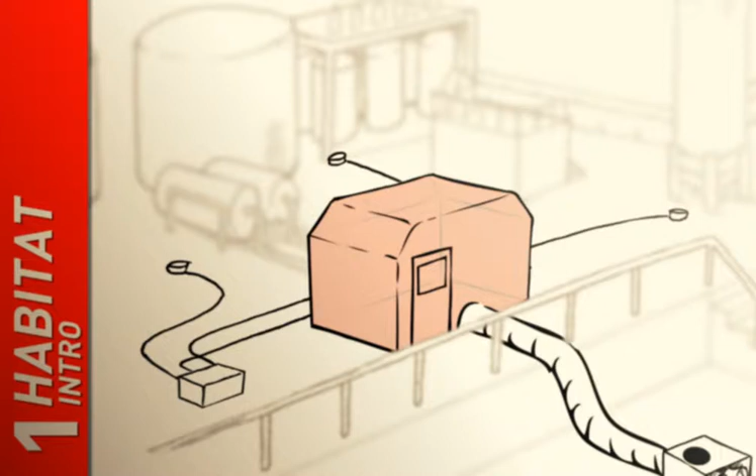A habitat is an established and safe solution for isolating an object or work area. Habitats enable hot work in exposed areas to be carried out safely. An overpressure is established inside the habitat, which makes it possible to work without gas from the surrounding area seeping in. As for all hot work, a risk assessment must be carried out in advance.

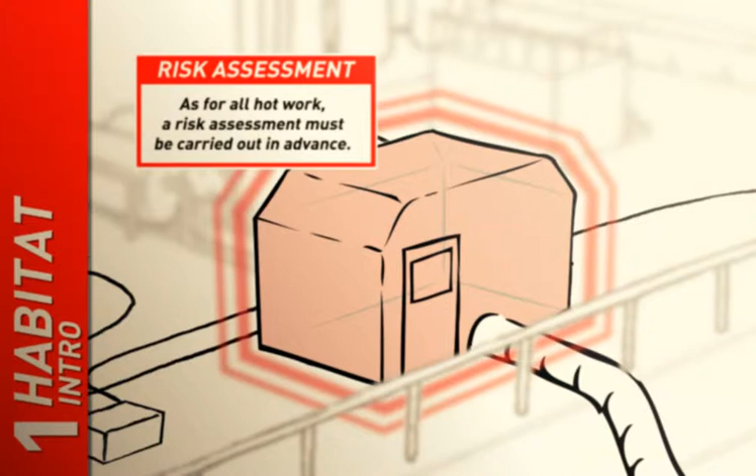The use of a habitat requires a dedicated habitat safety guard, who has the important task of monitoring the worksite. Planning and risk assessment in connection with the construction of the habitat shall meet a number of HSE requirements.

The construction of the habitat, as well as the strength of the fabric, must be able to withstand the relevant wind stresses in the area in which it is placed. The fabric must be fire retardant. Escape routes shall be adapted and labelled for safe evacuation.

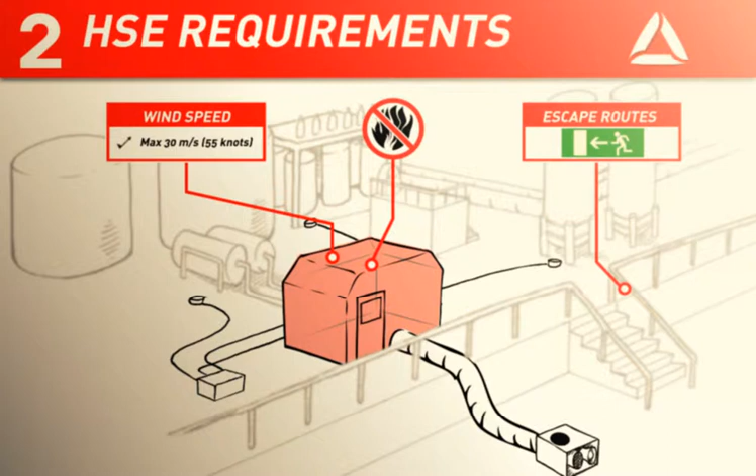The habitat must be equipped with ignition source control, so that the electrical supply to tools and equipment is shut off if gas is detected. The habitat shall be operated and maintained by personnel who have the necessary competence. When working in the habitat, ergonomics, noise and exposure to chemicals must be taken into consideration.

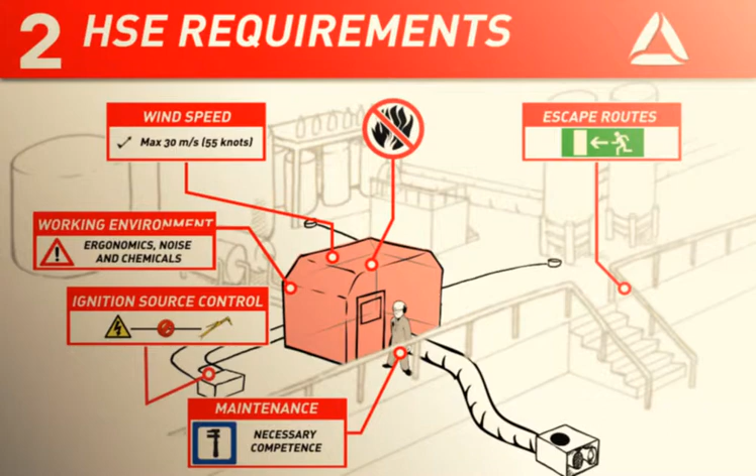Working Together for Safety has prepared a recommendation regarding the use of habitats as an ignition source control measure. You can find more information about the various HSE requirements in this document. The rest of this animation presents a summary of the recommendation, which focuses on the safe use of habitats.

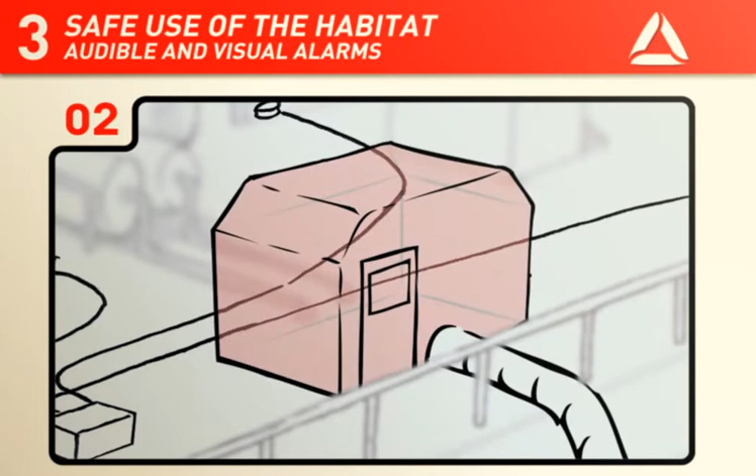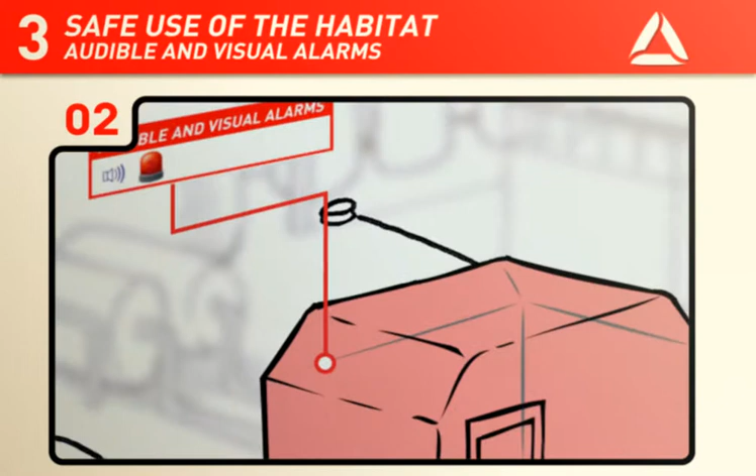The habitat shall be equipped with windows, so that the safety responsible outside the habitat can see and maintain control over the work inside the habitat. Communication must be established with the central control room, and the habitat system shall be equipped with both audible and visual alarms. Welding equipment must be placed inside the habitat, since these are not usually EX-approved.

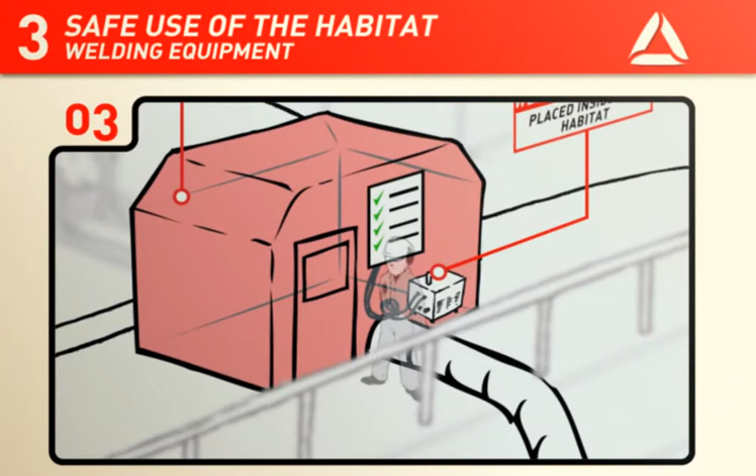The safety functions within the habitat shall be checked and tested before use, and inspected daily in accordance with checklists. Checklists shall be stored together with the active work permit.

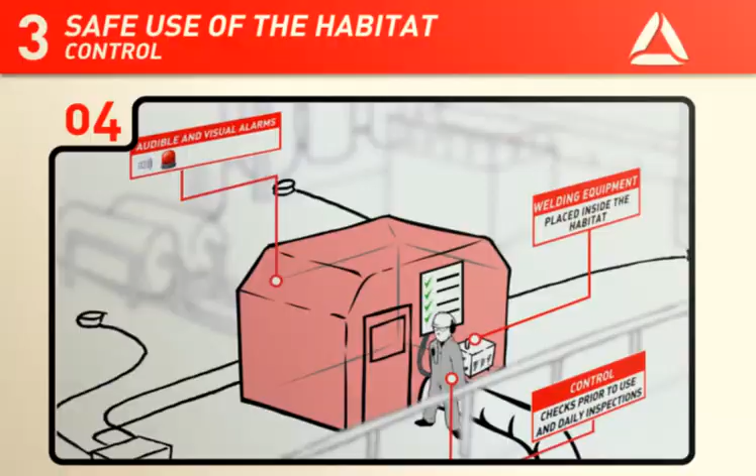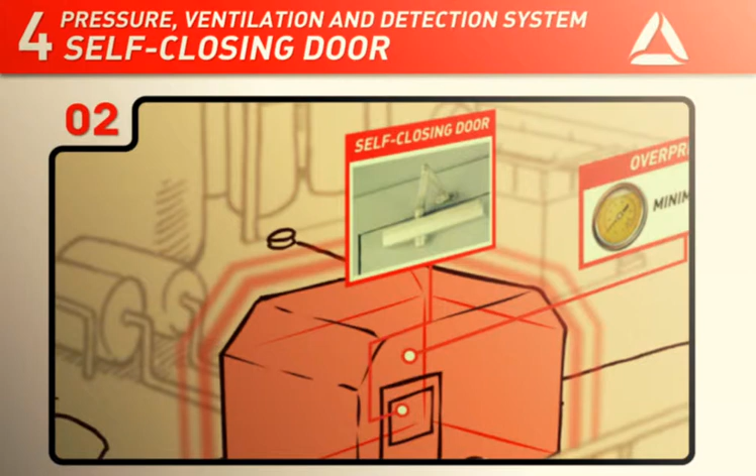The habitat must be constructed so that an overpressure of a minimum of 50 pascals can be established. The habitat can lose overpressure after just a few seconds of the door being open, and should therefore be equipped with a self-closing door. The fan or compressor should be placed in a safe area to ensure that no flammable gases are pulled into the habitat and air supply system.

Electrical and pneumatic fans shall be EX-approved for use in classified areas and feature an emergency stop device. The fan shall be shut down and damper closed if gas is detected at the air inlet, or the emergency stop device shall be used.

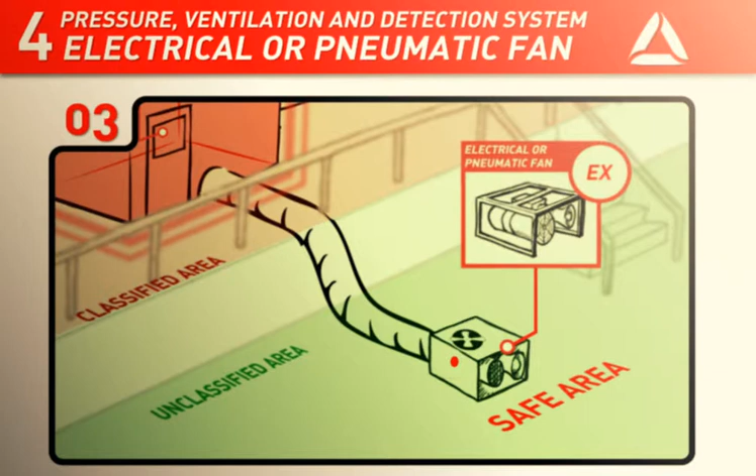For work in the habitat which represents an ignition source, even after the electricity or gas supply to the habitat has been cut off, the fan unit and damper must be independent of the working electrical current to ensure continued overpressure in such situations. The habitat must be equipped with at least 3 external gas detectors.

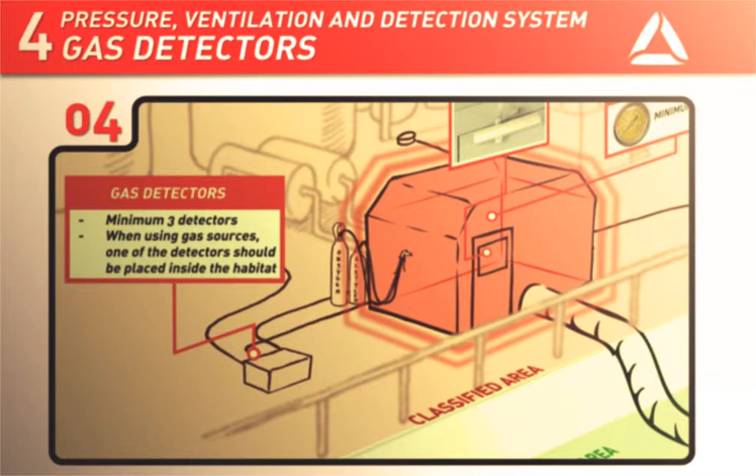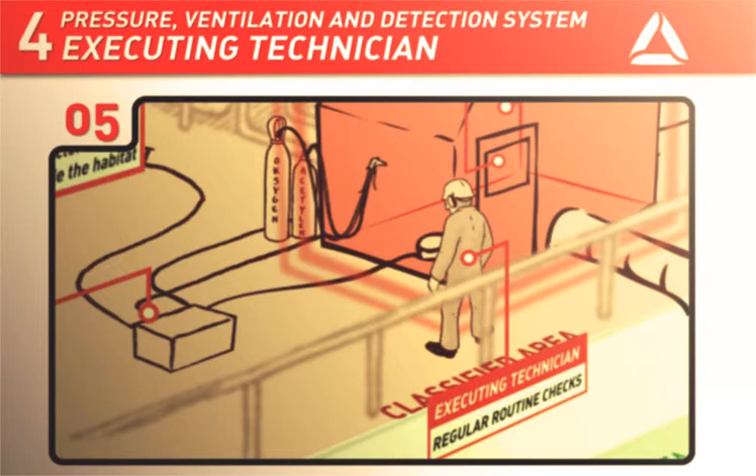When the habitat is used with any gas sources within the habitat itself, one of the gas detectors should be placed inside the habitat at the lowest level possible. The executing technician is responsible for carrying out regular checks to ensure that the gas detectors are correctly placed.

The habitat should be equipped with a zinc bucket for used welding electrodes, and appropriate fire extinguishing equipment both inside and outside of the habitat. Water bottles or water tanks for cooling the workplace should also be available in the immediate vicinity.

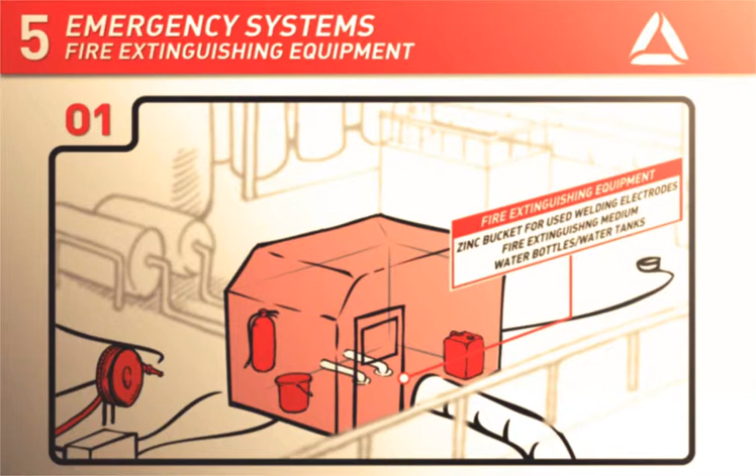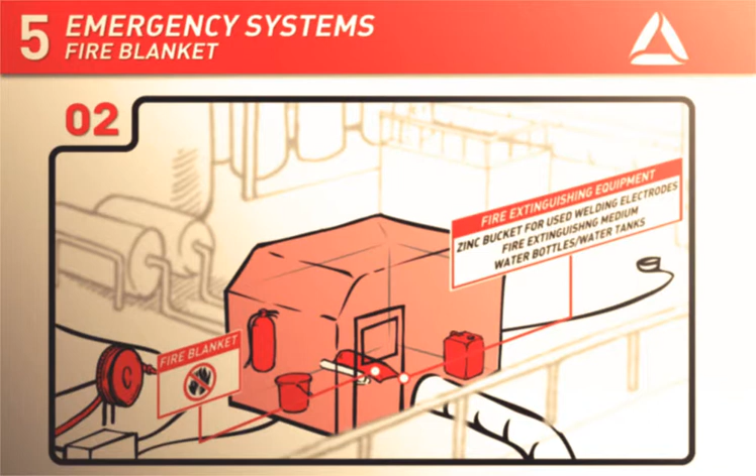The area around the work site inside the habitat must be covered with fire retardant material, such as a fire blanket, so that no sparks or hot work damage equipment or the habitat.

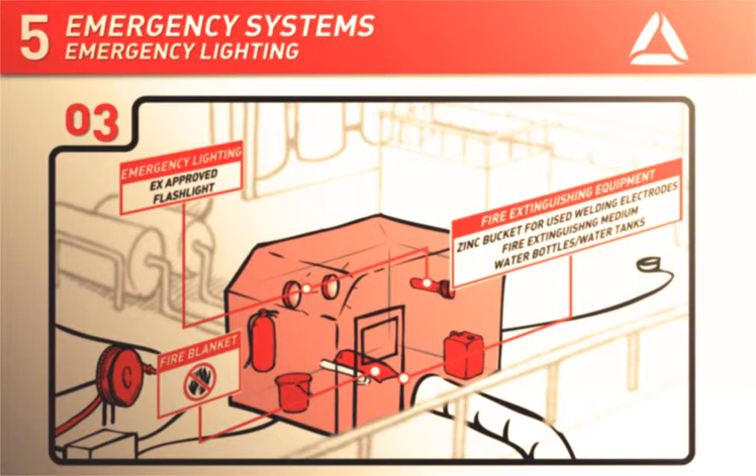There must be sufficient emergency lighting inside the habitat. EX-approved flashlights should be available as a backup. A knife should also be available so that workers can cut themselves out of the habitat if necessary.

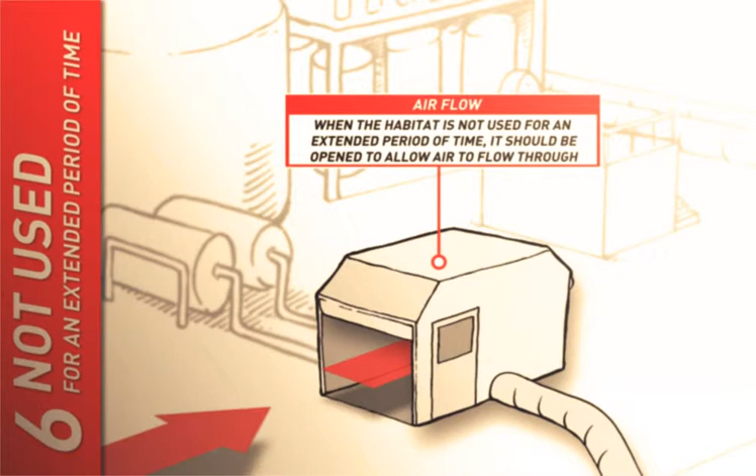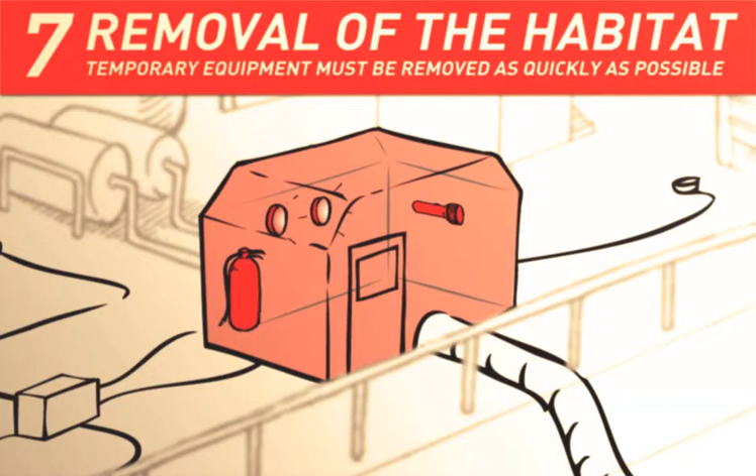When the habitat is not used for an extended period of time, it should be opened to allow air to flow through. Any temporary safety measures should be returned to normal operation. After use, the habitat and other temporary equipment should be removed as quickly as possible so that the facility's operations can be returned to normal.

There are often large amounts of dust inside the habitat, so appropriate personal protective equipment must be used when removing the habitat.

The recommendation contains useful checklists, which summarize the requirements relating to the use of habitats. Use them.